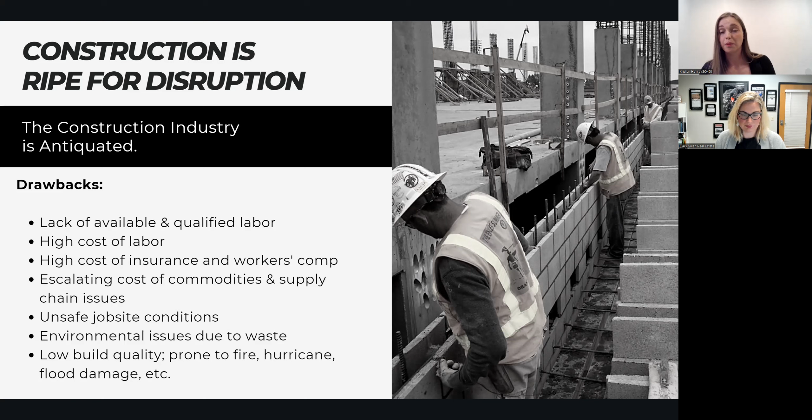Construction has remained very much the same for hundreds of years. Even today, we still have construction workers climbing up tall ladders to hit small pieces of metal into the side of buildings. There's a lot of lack of safety in the industry and a lot of really antiquated methods that could use some improvements and disruption. So currently, construction is facing that issue with the lack of available and qualified labor. The cost of labor is very high, the cost of insurance and workers' compensation, commodities, supply chain issues, unsafe job conditions, environmental issues, and just an overall low build quality. We've seen a lot of really unfortunate natural disasters happening across the country, and a lot of people are losing their homes because of it.

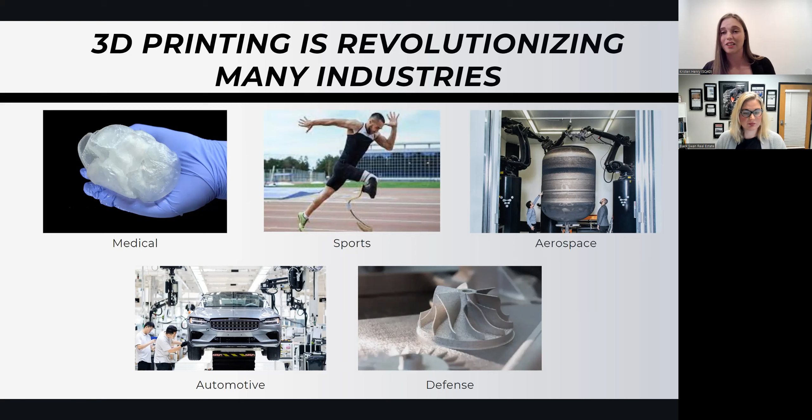However, 3D printing has been used in a lot of different industries lately. We have the medical industry, where we're 3D printing tools and parts and even organs out of live tissues, which is super cool and exciting. In sports, Wilson recently developed an airless basketball that's all 3D printed, really revolutionizing the sports industry. We have prosthetics, all sorts of cool things being used to revolutionize aerospace, automotive, defense. All of these industries are really taking advantage of this great technology, which allows you to create parts faster and more efficiently.

So as Elaine mentioned, she was holding up that sign earlier - plastic 3D printing is a really common thing out there. I'm sure you guys have seen some of the small scale plastic desktop 3D printers that you can use to 3D print anything from useful parts to Christmas presents to all sorts of things. There's a lot of different options out there with plastic and different types of plastic - flexible plastics and hard plastics, structural, all sorts of things. We're even 3D printing metal nowadays. Various parts can be 3D printed out of metal, and that industry is really starting to take off.

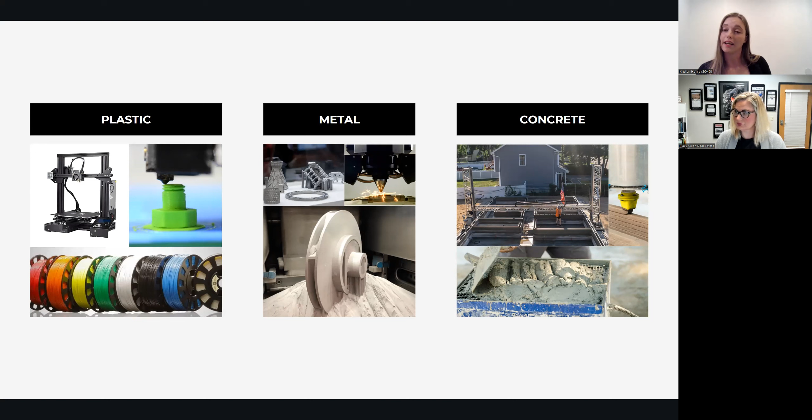And now we have concrete. So these houses are not created out of metal or plastic, any of those small scale 3D printers, but the principles are really similar. Instead, we're using concrete and laying it down layer by layer, stacking that concrete in order to create a structure. SQ4D is really hoping to use this concrete 3D printing technology in order to revolutionize the construction industry. Our motto is changing the way the world is built, and we feel very passionately about that, really trying to take this awesome new technology in order to change the way houses are built. Our autonomous robotic construction system, ARCS, is what we use to 3D print structures, and we have been completely self-funded up to this point.

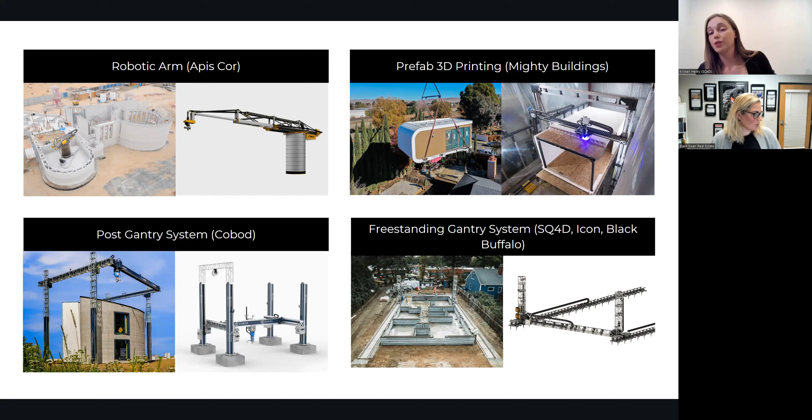So those towers move back and forth on the tracks, and then the extruder, where the actual concrete is coming out, moves side to side on what's called the gantry, and all three axes move together in order to create whatever shapes and structures you want.

So a lot of you probably have not even seen a 3D printer in action up to this point. So I'm going to play this video so you guys can get an idea of the process of building a home with a 3D printer.

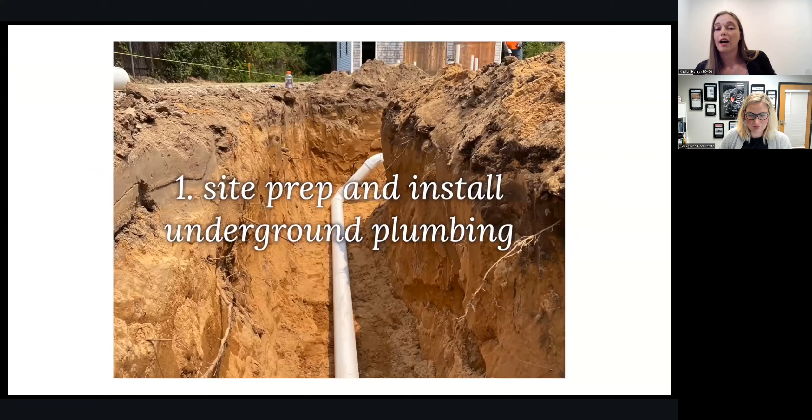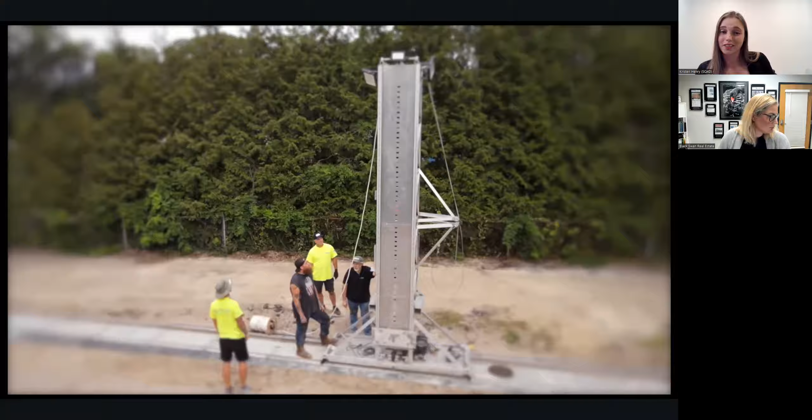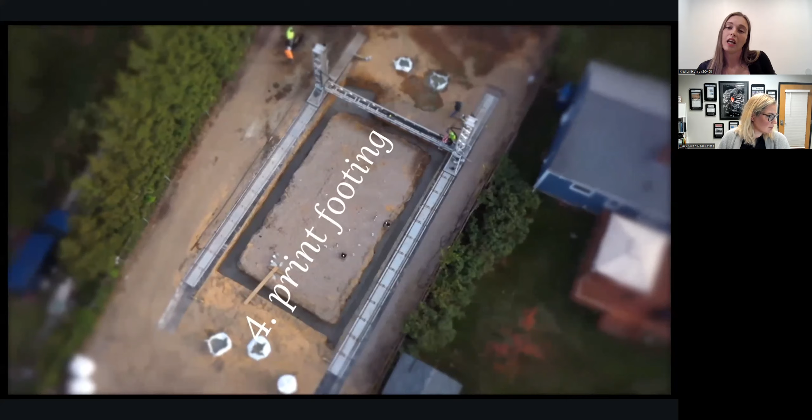So to start out, the site prep is the same as traditional. Rough plumbing is installed, and then we actually set up the printer on the site according to whatever dimensions are needed in order to print the particular project. And then we can excavate the footings, that's the same as traditional construction. After which we actually print the footings, the printer moving back and forth.

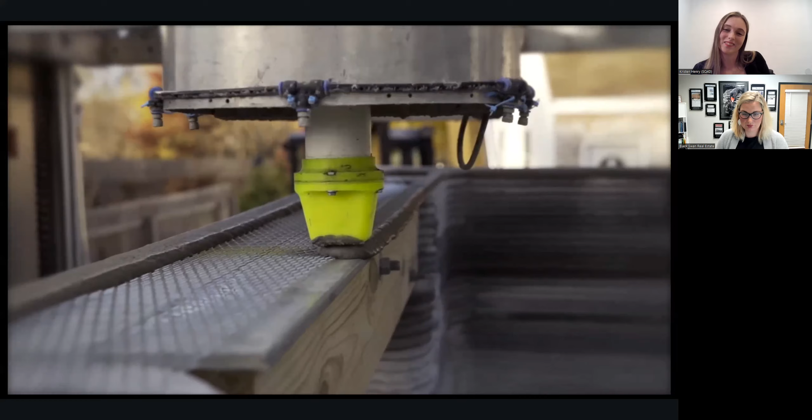That is what it looks like to 3D print a house. And there are a lot of different houses out there that have actually already been 3D printed.

In Calverton, New York, SQ4D printed the then largest world's permitted 3D printed home, which was 1,900 square feet, 3-bedroom, 2-bathroom. We have companies that are 3D printing 3-story apartment buildings. This one was built by COBOD out in Germany.

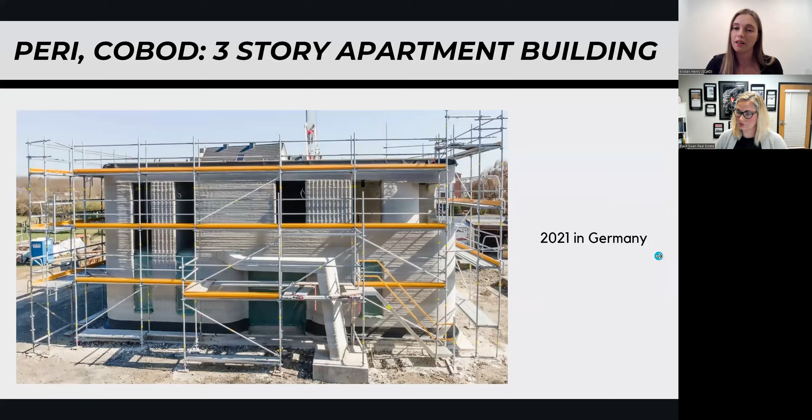SQ4D's Riverhead home was the first home in the world to have 3D printed footings, foundation wall, and slab. That was those subterranean parts you saw earlier in the project, because at SQ4D, we're really focused on 3D printing as much of the house as possible in order to bring as many cost savings as we can to the consumer.

Kristen, can you describe for us what you were narrating during the video? I think there was some audio interference, so we couldn't exactly hear what you were saying. Could we go back one slide, and then maybe you can describe—people have seen the video now, so that's in their recent memory—but can you walk through what you were narrating there, how you set the machine, how you work around the electrical boxes, how you have the template, all of that?

Yes, thank you for bringing that to my attention. So absolutely, SQ4D, we're 3D printing starting subterranean. So we 3D print that foundation in order to have a nice level surface to print off of. Can start to print the foundation walls, go ahead and backfill the slab, self-leveling as we go. And encased in the slab is conduit so that we can run electric after the fact. So that's really nice because then the conduit is actually entombed in the slab, making it fireproof, which is super exciting and a very helpful additional safety in the process.

Then we keep 3D printing the house until we get to different checkpoints, one of which is slicing for electrical boxes in order to put that in all the outlet locations, after which we can just keep 3D printing over them until we get to the light switch height and countertop height for various appliances. Then we add those electrical boxes in. Keep on printing until we get to the rough openings, the doors and windows—the top of those we just conventionally frame out—and then can 3D print right over top of it and keep going.

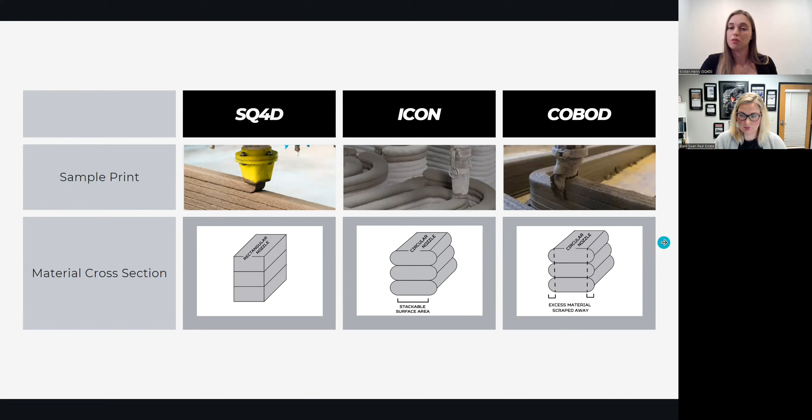Some companies use a scraping arm bead to take that circular bead and flatten it out along the edge as they go. Others use a circular bead that results in different looking geometry—imagine taking two tennis balls and smushing and stacking them, so you get a rounded edge as you go. This leads to a different aesthetic compared to the scrape bead versus the rectangular bead, which results in layers that look like that.

At SQ4D, we're using Portland cement, sand, and water—that's it. It's very much readily available, traditional materials you'd expect in order to create the concrete. Some other companies in the industry are using geopolymers, admixtures, accelerators, plasticizers, and all sorts of chemicals to create a 3D printable mix that works with their machines. Overall it's called concrete 3D printing in general, but some companies aren't even using concrete, rather various clays, geopolymers, or other materials.

As I mentioned, SQ4D is one of the companies that is 3D printing subterranean as well. We really believe that in order to optimize as much of the building process as possible, we need to be printing a great percentage of the house. That's what's going to lead to the most cost and time savings, rather than bringing concrete trucks into small, difficult to get into areas. We use our mixer on site to self-level and create the slab, as well as all the interior and exterior walls above the surface.

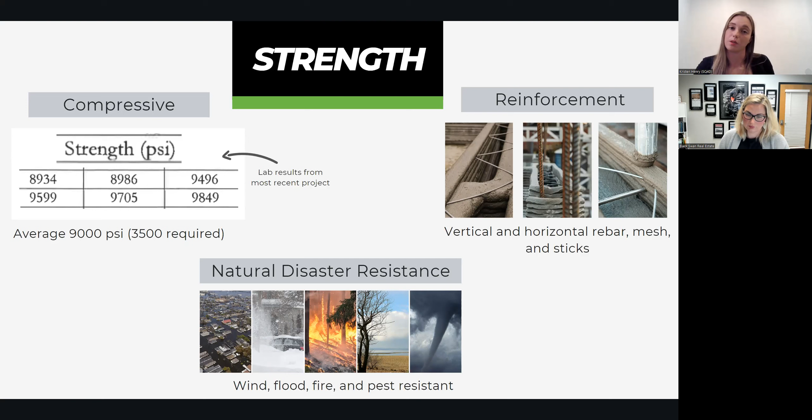As I mentioned, in light of increasing natural disasters, the homes are wind, flood, fire, and pest resistant. These homes are built to last and stand up to a lot of these disasters going on. Cost is another big thing. By nature of quicker projects, you have less carrying costs because of shorter build times, but also there's a lot less workers and liability on the site, which is very helpful in light of the difficulties the construction industry is having with labor shortages.

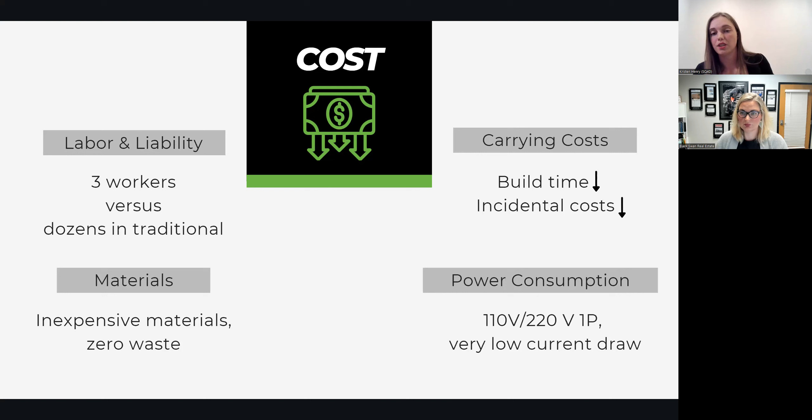Materials are another huge thing. In Long Island in 2021 and 2022, the price of a 2x4 actually reached $14.65 at one point, which is just absolutely ridiculous due to supply chain crunches. That price fluctuated and was driven way up. People used to go get 2x4s for a fire pit in the backyard because it was less expensive than getting firewood, which is crazy because we really jumped through the roof on 2x4s. Concrete is pretty consistent and is not as subject to those supply chain issues and fluctuations.

Worker safety, another thing I've already touched upon. By automating construction, it is far safer for workers. You don't have workers climbing tall ladders or walking across roof struts or doing any of the things that contribute to OSHA's Fatal Four. Falls, trips, and slips accounted for 37% of fatalities in construction this past year, which is more than all the other sectors of the workforce combined. Construction is really dangerous, which is also contributing to not as many people wanting to work in the field, leading to shortages. So automating things is just inherently safer.

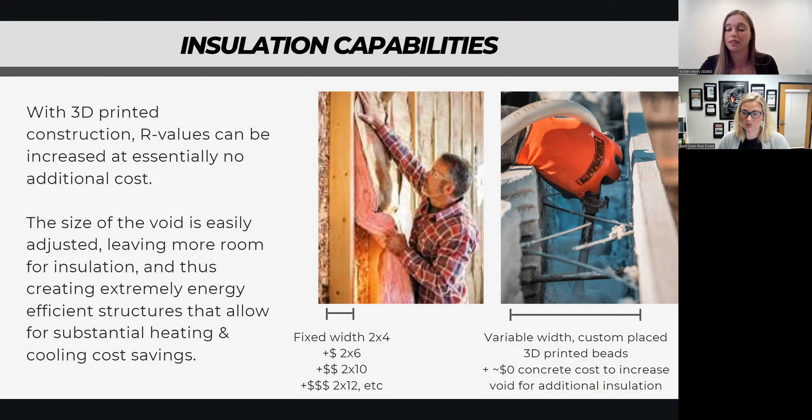This is an area I know a lot of you are really excited about: the cost of 3D printing and what some of the numbers look like. SQ4D recently sold one of our houses in Islandia, New York that we printed, and it sold on the open market for $550,000, which was 10% over the $500,000 asking price. It's really exciting because builders can tap into unprecedented margins. That house was profitable, and the homeowner is already seeing equity increases in the home.

Along with that, insurance costs are much, much lower for the home builder, which a lot of people don't think about. Since there's such a high fire rating and easy flood remediation, we're able to save homeowners a lot of money on home insurance. For example, our 3D printed home in Riverhead, we were paying $658 a year for insurance, compared to well over $2,000 a year for a regular home. Along with this goes very little repair needed on rentals, so nobody's going to open a door too hard and put a hole in a concrete wall like you might with sheetrock.

Subcontractor building is also another really cool area. SQ4D served as a subcontractor on our most recent home, and we charge $50 a square foot for the printed home. In the next couple of months, we're going to be printing with Habitat for Humanity, who has signed a contract for $99 a square foot, which we expect to be profitable and still deliver a less expensive home than traditional construction would. So it's really an all-around win.

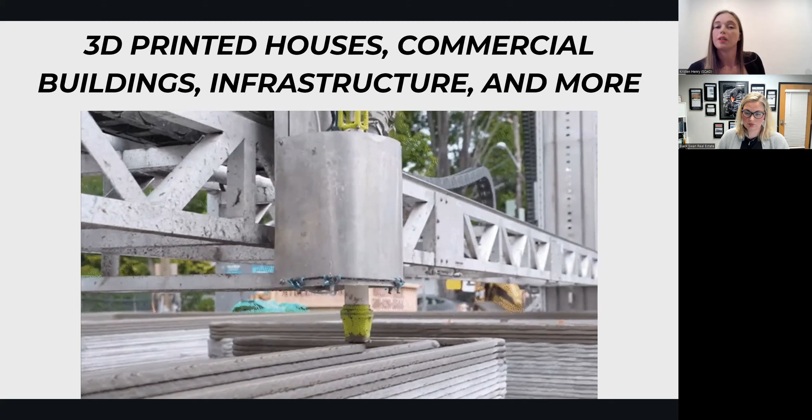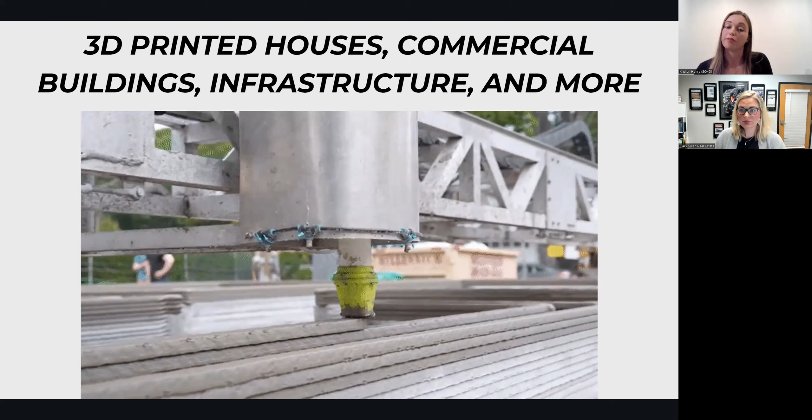So that brings me to where you can expect this industry to go. Currently we're 3D printing houses, but in the near future we plan to print commercial buildings and infrastructure. If we're able to make a difference 3D printing houses, just imagine repaving giant roads across the country. We're really going to be able to use the technology to the fullest. There are also exciting material considerations coming up with the sequestration of carbon and the addition of glass as a partial or full replacement for sand or other aggregate, in order to take materials otherwise destined for the landfill out of the environment and put them into homes. Other companies are also working on putting plastic as aggregate in the mix in order to keep that out of the environment and use it in a useful way.

Within the industry, there are a lot of different options that different companies are taking advantage of. Companies can sell machines, sell homes, service subcontractors, rent homes. There are joint ventures, licensing, service and repairs, consulting. There's really a lot of great things happening in this industry and a lot of different ways people are taking advantage of it. So you may see ads for construction 3D printers being sold in the near future, as well as these homes popping up in a lot of different areas across the country.

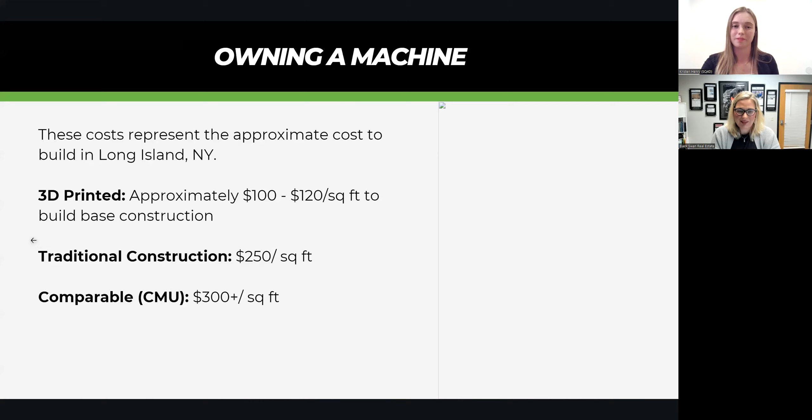Clearly I'm very interested in this.

Victoria has another question: how difficult are these homes to renovate or reconfigure, such as moving doors, windows, or walls in the future? That's a really great question. So with 3D printed structures, you actually are able to move around some of the non-load-bearing interior walls. Obviously, knocking down concrete is not as easy as moving 2x4s and such, so it is a little more difficult to renovate, but that's at the expense of a home that's really built to last and is kind of indestructible.

So there is a possibility - you could certainly wood frame walls after the fact as well if you wanted to split up rooms and add some different aesthetics to it. So there is possibility, but for the most part, we advise kind of against that. We actually warranty our homes for 50 years.

We have a 50-year warranty on these structures, which is just unheard of, because we believe so strongly in them. To put that into perspective, in Minnesota a warranty for stick-built construction is typically a year, which is already considered a long time. We really believe these structures are built to last, and that's the goal. So though you can do renovations, for the most part it's going to be a generational home passed down throughout the family for years and years.

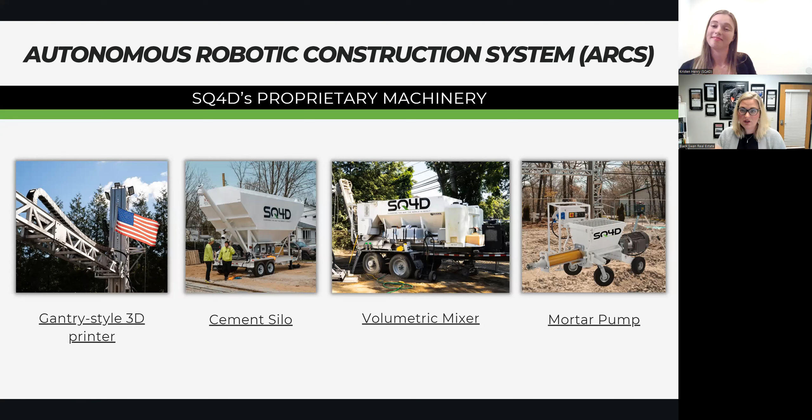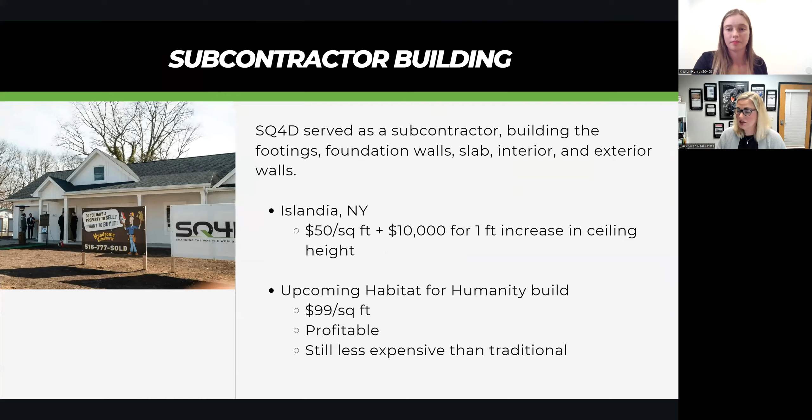Another interesting question, I really like this one because it has me thinking about what we might be able to do at Black Swan. Can you rent the machine, can someone rent the machine to build a structure? That's a great question as well. A lot of different companies in the industry have actually chosen to go that route, renting the machines to different people. One of the biggest advocates and players in that market is actually universities. Universities are super excited to rent the machines for different projects and such.

At SQ4D, we're actually focused mostly on selling the machines and actually printing the projects, just because we really believe that people should learn how to use this technology and really get to take advantage of it, grow with it, and learn things. There's really not too high of a learning curve, but things like architectural plans and such, people aren't super familiar with all of the capabilities of 3D printing yet.

It's kind of a waste to do one project without really learning all the advantages you can get out of this process, whether that's putting in curved walls, different design patterns, printing fireplaces, or printing islands in place. A lot of these things are just not possible with traditional methods, so people aren't super familiar with them. That's why we're looking to sell machines, to get people really invested and able to make profits as they continue to learn the process and get good at creating structures.